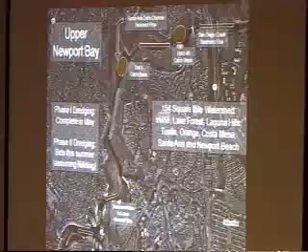He gave an overview of what most people already know, pointing out how the Upper Bay relates to the Lower Bay. The Upper Bay sits within a 154 square mile watershed including the cities of Irvine, Lake Forest, Laguna Hills, Tustin, Orange, Costa Mesa, Santa Ana, and Newport Beach. As shown in the illustration, sediment flows down into the Lower Bay.

The current Upper Bay project is primarily an ecosystem restoration project, a component of which is building two catch basins, referred to as Unit 1/3 and Unit 2, with the Jamboree Bridge shown for reference. These catch basins are designed to catch sediment coming down from the watershed, with the hope of catching enough so that sediment does not make its way down into the Lower Bay.

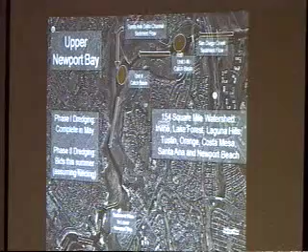Where we're at with phase 1 of the Upper Bay project is that it's due to finish in May, and then phase 2 will go out to bid in probably June or July, assuming stimulus funding occurs or other funding mechanisms occur with the federal government. We feel good that stimulus funding will occur for the Upper Bay project because it's shovel-ready and it's already been designed for the most part, and it's ready to go. So we feel confident that we'll be funded for that.

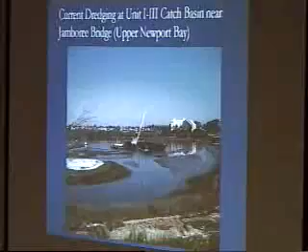This is just a picture of what's happening at the Jamboree Bridge with our dredge equipment that is currently there right now.

Now we see by the illustration that the material makes its way, and has made its way, down into the lower bay. Our preliminary estimates right now are that we need about 1 million cubic meters to be dredged from the lower bay, which is in both the federal channels and the federal areas of responsibility. When I say federal areas of responsibility, I basically mean from project line to project line, and all of these channels for the most part.

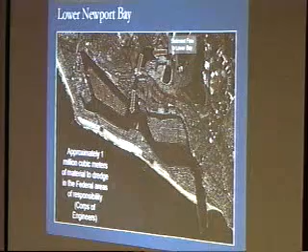So there's 2 different components with our Lower Bay project. One component is funding, and these are both very big components, and we're dealing with them on separate fronts.

Federal funds and stimulus funds are not immediately available. We were hoping that they would come sooner than later and that the Lower Bay project would qualify, but we're finding that some of the other national projects occurring in our nation are more shovel-ready. So now it's kind of a waiting game to see how the city of Newport Beach and the Lower Bay fits into the Corps of Engineers model in terms of funding this sort of effort.

But if that doesn't work, we can always rely, hopefully, on the regular federal budget for next year and beyond.

The Corps of Engineers is committed to helping out the city of Newport Beach. We've had meetings with the Corps, including the Colonel and several members of the City Council, to talk about how the Corps and the city can work together to fulfill a common goal of dredging lower Newport Bay. The Corps has indicated that they're very supportive of the city's efforts, and they will do everything they can to help us out if the city solves our contaminant issues and if there is adequate funding. Assuming those 2 things come into play, the Corps has expressed great interest in coming to help us. So we have a good relationship with them, and we're looking forward to working with them in the near future.

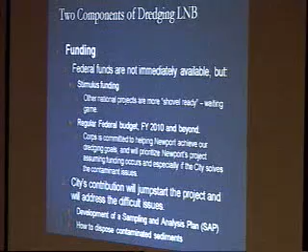Question for you, because sometimes when we talk about the amphipods, my eyes start to glaze over. So I wanted to ask you first about the CAD, because it seems to me that what we need to do is dig this big hole, and then there's some question as to the quantities that we're going to put in the hole. The quantities that we put in the hole depend on the amount of sediment that is determined to be contaminated and not suitable for LA3 or beach nourishment.

Secondly, it's sediment that could include that of tenants around the harbor, such as American Legion in those areas that can't currently go to LA3. So we may be able to help out local tenants of the harbor.

And then another aspect that will help determine the quantities is whether we're going to dredge to design depth or to authorized depth. So I kind of wanted to get some sense of what the range of volumes are that are sort of in play to put into a CAD.

And then within the testing, within the sort of contaminated category and clean category, what the city is doing to determine that line, and at what extent or how much effort do we want to go to fine-tune that line, or at what point do we just want to say, you know what, we've done a lot of testing, and when you get into Tier 4 testing, it gets very creative, there's no standards, and we start thinking eelgrass and that kind of stuff.

So those are some of my questions, I guess, as you move along that I sort of want to try to understand. Okay, and I'll do my best to explain those as the presentation proceeds, and stop me if I need elaboration.

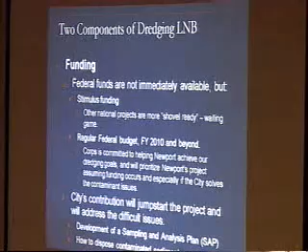So let's see, I'll go back to this slide and remind there are two components of dredging. One is funding, so I just talked about that. But the second component is testing.

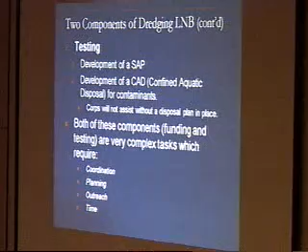One of the things you have to do when you dredge a harbor is develop a sampling and analysis plan, a plan that the agencies all have to review and approve before you can actually do the chemistry and toxicity tests required for any type of dredging program. So one is to develop a SAP, but also to develop a confined aquatic disposal site for contaminants.

Now, the city has not yet committed to a CAD site, but we are going down that path, and I'm going to explain a little bit later on what is leading us to believe that a CAD site is basically the best option for the city of Newport Beach.

Both of these components, funding and testing, are very complex tasks which require coordination, planning, outreach, and time. Coordination certainly among all the agencies—there are so many, 7, 8, 9, 10 different agencies you have to coordinate with when doing a dredging project. When you consider all the fisheries organizations, the Corps, a couple branches within them, the EPA, Coastal Commission, and all these folks that have to be on the same page when developing a plan.

Of course, planning. Outreach is very important, getting out to the community. Both myself and Councilmember Daigle are starting to make presentations throughout the community to let people know what's going on so that we're all on the same page. Time is a factor too—these types of projects don't happen overnight. They take a long time, and there are bumps along the way, so it just comes with the territory when you have a major project like this.

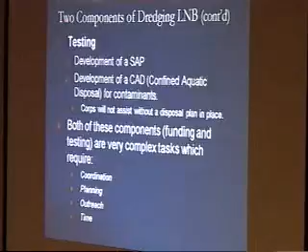This 700,000 is a very big number. I know that, and everyone else agrees to that. It's incumbent upon our consultant who is working with us right now, and I'll get into the next slide, who's doing the testing, to try and narrow that number down so that we don't have to dispose of 700,000 yards.

And ideally, in my mind, it'd be nice if we were somewhere in the 200,000 cubic meter range. I don't know if that's going to be true or not—we're going to know a lot more in the next few months. But this is a large number, and it's something for us to work with right now so that we can plan big and then narrow down as we learn more information.

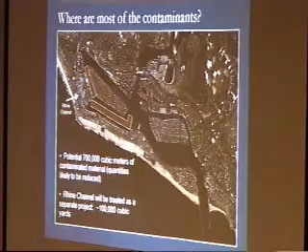Okay. And that consultant we are working with is called New Fields. That's their name, and they're doing all the testing in the harbor.

A lot of things have happened since that contract was let back in September, October, and the project was broken down into segments. Let's just say there were six segments — A, B, C, D, E, and F. We have to change our focus now with this project, looking at it from a segmented point of view to an overall global project point of view.

One of the reasons is that part of our discussions with some of the regulatory agencies months past led us to believe that certain past data we had, we could use and apply toward this current project. Well, we're finding that's not altogether true anymore.

So the agencies are making us go through a little bit more rigorous testing program and protocol, and that's why we're coordinating with our sampling and analysis plan that we turned in yesterday. Our sampling efforts have been expanded, and areas where we didn't think they would require very much testing now have to be tested and have to go through bioaccumulation, chemistry, and toxicity tests. Right now we're trying to negotiate with the agencies to minimize the degree of that testing.

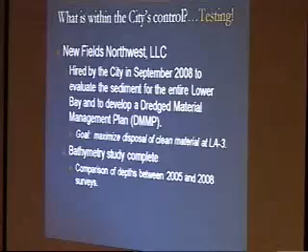Okay, so I've kind of touched upon this already. The goal, of course, is to try and maximize the material that goes out to our offshore disposal site in the ocean, called LA3. Our bathymetry study is complete, and what that does is compare depths of the bay from 2005 to 2008. That was important because it leads us to determine how much quantities we have to dredge. It compares depths.

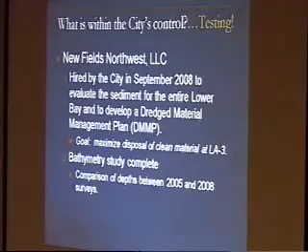Chris, in layman's terms, can you share with us the difference in the depth of the lower bay between those two studies?

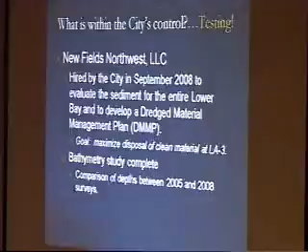There's not a whole lot of difference, believe it or not, between the depths in 2005. We haven't had a lot of sedimentation in those three years. So when we were getting back to our testing contract, we were hoping that a lot of that data from 2005 would still be valid, since there hasn't been a lot of increase in sedimentation. But we're finding that not to be true now.

I don't want to get too much into detail, but you have amphipods, which are test critters used as benchmark test critters. If those amphipods survive, that means you have sediment that is suitable for ocean disposal. If they don't survive, then you have to figure out where to put that sediment, among other tests, of course.

But believe it or not, picking out a suitable species of these amphipods is a complex process. We found that some of our different amphipod species failed. So we spent about a month or two going through a whole other retest so that we could get a suitable species that would work for Newport Bay.

Given that there's over 7,000 kinds of amphipods, how do you find a suitable species? Well, in the Green Book, they have certain preferred species, like a suite of species. Some agencies, when they review the plans, prefer some over others for certain applications.

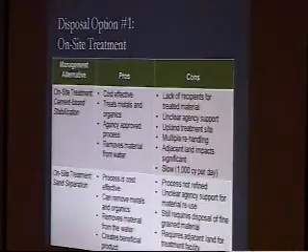So with that, I'd like to introduce Steve Cappellino. If you'd please come up here, Steve. Council members. As Chris mentioned, you have a document there in front of you that we just put together, and what we really tried to do with this document was lay out a feasibility study. There's been a lot of talk about building a CAD site, and I'll talk about that in a second, what that is, and what are some of the pros and cons with that.

But one of the things that we wanted to do with this document was to try to lay out all the options that are out there right now in Southern California, and some of the pros and cons. Try to describe to you, if you did select one of these other options, what would that look like to implement in Newport, and lay out a little bit of a path of why we've come before Chris and said we think that a CAD site would be something that you should consider. So I'm just going to quickly run through these. Please interrupt me if I don't provide enough detail on any one of them. But really, when you're dealing with contaminated sediments in Southern California, you're pretty limited in what options you have.

One of the first things you could do is you could look at treating the material. When we say treating the material, you're trying to do something that can either immobilize the contaminants in the sediment such that they don't cause biological effects either to people playing in the water, eating fish that live in the bay, or actual effects to the animals living in the bay.

So you can either stabilize them to try to make the chemicals so that they become inert, essentially, or you do something that strips out the contaminants. Essentially what you're doing is you're either leaving the material behind in the bay in an inert state, or you're removing it, taking the contaminants out, and then trying to beneficially reuse that material.

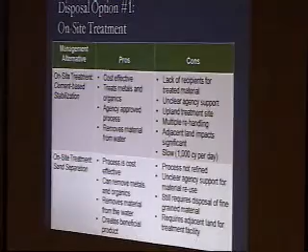Probably the biggest problem with Newport is that the sand content for a lot of the areas where you guys have contaminants is not very high. Where you guys have sand, most of it's pretty clean. Where you have a lot of your contaminated stuff, like down in the West Lido area, up in the Rhine Channel and stuff, the sand content's actually pretty low, low enough that it's really not very cost-effective to do this, meaning that you go through this entire process and you treat it, and you still have 50% of material that has to get dried and taken to a landfill, and the portion that's able to go out to the beach is not very good. It's typically reserved for places where you have like 90, 95% sand.

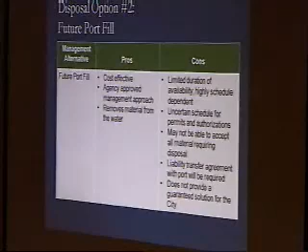One of the more popular options that has been used in the region up until the last couple of years was to look at a port fill, and I say future port fill there. But basically, Port of LA, Port of Long Beach, they're always creating new terminals. They're filling slips, they're building and expanding their terminals there. And the way they do that is essentially just dike off an area, pump or dig out all their contaminated stuff as well as clean material, and then push it in there, dry it out, put clean stuff on top, asphalt, and then turn it into upland.

That used to be a good option in the region up until a couple of years ago when a lot of the environmental impact issues started to rise, like air quality and degradation to local neighborhoods and stuff. And what happened is you saw a lot of lawsuits come out up in LA Long Beach.

Pretty much what happened a few years ago was a lot of these large development projects kind of ground to a halt. Unfortunately, the need for fill material, the supply that needed to go into there, didn't stop growing. What happened is it just backed up. The port - most of these fill sites get filled up with port stuff. They obviously get preferential treatment for their own material through normal operations up there. Secondarily, it would go to Corps of Engineers channels or local city governments up in the area, like the city of Long Beach, for example.

Right now, port fill sites are very few and far between. There's a couple going on right now, and they're overcommitted with the material that's going to go in them. So it's not a real good approach to bank on as an alternative, to say this is where we're going to put all our eggs in this basket.

One of the big things with port fill sites is the fill site is usually just one piece of a much larger puzzle when the ports create these. Typically what happens, like we're working with the Port of Long Beach right now on a very large fill site, and the project we're working with them on is one of 6 or 7 projects going in there. All of these have to be coordinated at the same time - when the fill site is ready, when the current tenants need to get moved out, when new tenants are coming in. One lawsuit in any one of those projects puts a delay into the entire thing and creates a domino effect.

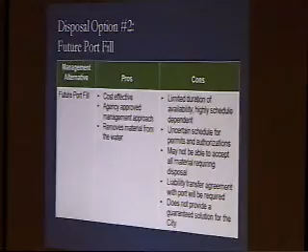There's also a big issue with liability transfer agreements. We've been involved in a few with the ports up there, and typically if they're taking material in from outside their own site boundaries, they have pretty onerous transfer agreements required. Basically it says that if anything ever happens with that material, or if anything down the road impedes their ability to develop that site, they're going to come back and hold whoever the owner of that material is liable.

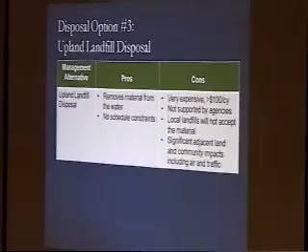Upland landfill disposal is really a pretty simple option. You dig it up, you have to dry the material so there's no water dripping out of it so it can be hauled on the road. Put it in a truck, haul it to a landfill, and dump it.

As Chris mentioned, we were involved with the Rhine Channel feasibility study for you guys five or six years ago, and we looked pretty hard at the landfill disposal option. We actually included meetings with the Orange County landfill authorities, and their official position was that, A, they didn't have the capacity to take the amount of material that would be generated, and B, they didn't really want the material because their landfills weren't necessarily permitted to receive contaminated marine sediments. So their official position was they didn't want the material.

The LA Regional Water Board - really covering LA and Orange County - their official position is they don't want contaminated marine sediments going into the county landfills. There have been a few small landfill disposal projects; I think up at Bolsa Chica there was some small stuff that went out, but typically flying under the radar, a few thousand yards here and there. But for a project of this size, if you want to take it to a landfill, you're looking at a private treatment facility, something like a Waste Management facility up in the desert north of LA. Typically, the city would enter into a contract with somebody like Waste Management.

They would come in for somewhere $100, $125 a yard. They would take the material once it had been dredged and dewatered, put it on their truck, sign a piece of paper, and then you're removed of all liability, and they take it away and haul it to one of these facilities. That's really your only option there. Very expensive. Agencies don't really support it, not because they don't think it's environmentally protective—these facilities are designed to hold this material—it's just that they don't want to see the capacity being used up for marine sediments. They'd rather see that material used some other way.

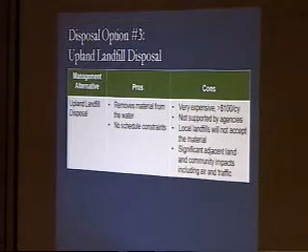Long Beach CAD site, just to jump the gun a little bit about what a CAD site is: it's essentially like an underwater landfill. Basically, you either take an existing hole in the ground that somebody else has already dug for some other reason, or you create a hole, put all the contaminated stuff at the bottom, and then cover it up with clean material, so that what's exposed on the surface layer for the animals and fish is clean native sands.

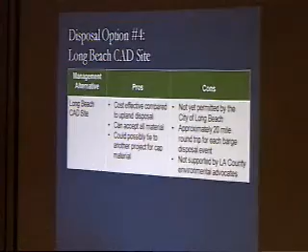In Long Beach, if you've ever been out in the Inner Harbor, there's a whole bunch of oil islands, with nice palm trees growing around them. Well, inside that circle of palm trees are oil rigs—they're basically drilling all over under Long Beach. The way they created those islands was they dug these giant pits in the Inner Harbor, stacked the material up, and created an island. As a result, all over the Inner Harbor of Long Beach, there are all these big pits.

The Corps, the City of Long Beach, and a bunch of other agencies back in about 2001 did a pilot study to prove that CAD sites would work here. CAD sites are used all over the U.S., have been used in the U.S. for many years, and in Europe for many years, very successfully.

Question for you—you're saying that in Long Beach their CAD site's been inclusive, accepting all kinds of material. If Newport, if we were to do one in our harbor, what's the viability of being able to accept sediment from some of our residents and so on who are now unable to dispose of their materials? We have the RGP 54, so the city's made every effort to simplify the dredging process for our local residents, but we've been really stymied by the contaminant issue. So would that be viable at all, to take that sediment too?

It's definitely viable, and that would be something covered during the permitting process—when you get the disposal site approved by the agencies, you'd essentially tell them this is what the intent is for, and it's going to be for everything within Newport Harbor, whether it's city, Corps, or local private dock owners who want to take the material to that site and use it as a low-cost alternative.

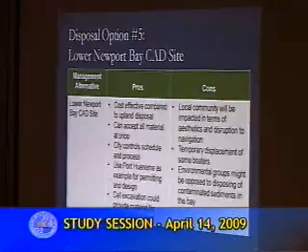What would be the schedule for permitting in Long Beach as opposed to permitting for a de novo facility we would create in Newport Beach?

Permitting a facility in Long Beach obviously would be a much quicker and cheaper alternative because it's already there and it's already been tested. More importantly, the site's already constructed and it's actually been used there. The real issue would be whether or not the city of Long Beach wants to permit it.

The city has concerns that if they permit that as a facility, there'll be pressure put upon them to accept material from other areas, whether Newport or Marina Del Rey or any place else. There's some internal struggles going on about whether they want to be perceived as taking other people's waste material, which is why this type of work is primarily what our firm does, so we have a lot of experience with these.

What we find out is that a lot of these end up becoming localized solutions. We're building one right now up in Port Hueneme Harbor for the Navy, the Corps, and the Oxnard Harbor District. It's this exact model that we're talking about here in Newport and what was used up in Long Beach. That one was really the same situation.

There's available space in the Port Hueneme CAD site right now that's in construction today. The problem is that because the Navy owns the land there, they have some internal policies about waste coming in from outside of the harbor. So anything that's within that harbor can go in that pit pretty easily. Nobody really has issues with it, but as soon as people start bringing it in from outside, it really starts to complicate it.

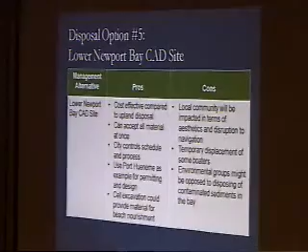I understand that because some of the council members saw a graphic where this was originally proposed right in the middle of a mooring field. Right, there's been some adjustment to that.

Right, the more recent area we're looking at is right in between, is that G and H? H and F, okay. Originally when we drew the first box in the preliminary maps we sent over to Chris, we put it squarely on top of where the mooring field was because we thought there would be less complaints if you moved people off their moorings than if you impacted an open area where sailboat races occur. But as you guys mentioned, it sounds like it was easier. There was no technical reason why we had it in one spot or the other, so the current idea is to shift it over to eliminate that.

And of course, there could be some environmental groups here, and there probably will be residents that would not be happy about the concept of disposing contaminated sediments in the harbor, even though they would be buried.

So what does a CAD cell look like? It's a very simple concept. Basically, you're just excavating out a pit, putting the contaminated material down at the bottom, and covering it with clean material. This clean material would be like native sediments from the harbor that are clean, basically what's out there right now. Plant growth and stuff would reestablish itself on top.

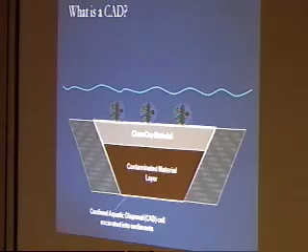Technically, from a chemical standpoint, to prevent the chemicals from moving, 3 feet is usually enough. The standard most people go with is 5 feet. In Port Hueneme Harbor, we're using 10 feet, because the CAD cell we're building is right in the middle of the active turning basin in the center of the harbor. So we build it at 10 feet so that if they wanted to deepen the harbor by another 5 feet at some point in the future, they could just excavate down without having to move any of the material.

So probably the safest option would be to assume about 5 feet. Question for you, Steve.

We're going to continue to pursue some of the testing, but we don't know if we're going to be able to clear some of those areas. Based on your experience, I know Josh has worked in the regulatory department at the Corps, what happens in a few months if we don't get clearance? What would be the city's options at that point? Can we just throw in the towel and say it's contaminated, and it's not that much more expensive to just put it in a CAD? How do you see things two or three steps down the line?

Our feeling is that the testing you guys are doing right now is great. Anything you can do to get the material out in the ocean is the best way to go by really fine-tuning what those numbers are. What we found, and it's really no different than what we ended up doing in Port Hueneme, is we started a parallel path. We started the designing and engineering assuming the worst case. You can always go permit it to the agencies telling them you need this big of a hole, and on the side you're testing and trying to minimize the amount of material that's going to go there. Nobody's going to complain if you come back and say the hole needs to be half that size, because you just lessened the impacts.

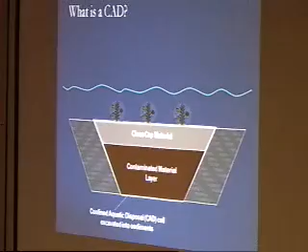But you can also put silt curtains around the hole. So where the barge goes in, drops the material, and leaves, they close the curtain behind it, essentially closing the hole in, so any material that comes up will settle back down. It's just a factor of the currents and how deep the material's dropping. Typically you try it a few times, see how it behaves, and adjust. At Port Hueneme, for example, we're not having any problems at all—none of the material's coming back up out of the hole. So it's just the type of material, that's how it's working.

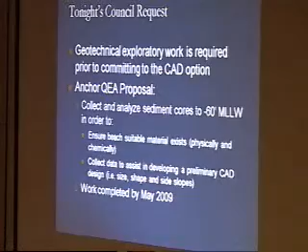Tonight's council request—to recap, the first part of this process was to develop the feasibility study, which everyone has on their desks right now. The second step is to do some geotechnical exploratory work, which is important because it tells us what type of material we're dealing with down in the harbor floor, whether it's sand or if we're going to hit rock. We're pretty certain we're not going to hit rock, and fairly certain it's going to be nice sand. But we have to do this preliminary study before we can make a decision to proceed further and make the big decision later on.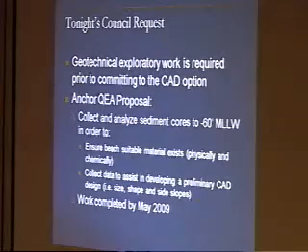So they're just going to core down to minus 60, in about 3 holes. They can do that within a couple weeks, analyze it, and be done with that by the end of May.

Just to give you an idea, the question was asked where the CAD site would be in relationship. We're proposing it to be around in this general area. We can fine-tune that, of course. This area right here is where about 200 moorings are. This is generally open water. There are about 20 moorings right in this area. So we'll impact some moorings, but certainly a very small percentage.

This right here is an alternate CAD site that we're going to go and do a core sample there as well, just because if these don't happen and we're out there the same day, let's put the guys to work, and we'll do an alternate site in case something bad happens. It's good to have a backup plan.

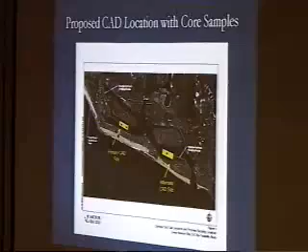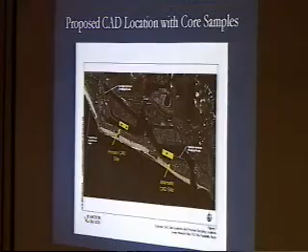Chris, the primary site appears to be in one of the places that's a primary source for material that would otherwise be placed in the CAD. Are we going to sort of bring it up and put it right back down, or how does that work? It'll be constructed in a way where those are some details that we'll have to work out as far as the mechanics of how the CAD site is actually built. We'll look forward to a report a little bit later on.

But maybe there'll be two holes, like an interim hole. You build a small hole, and then you put the top layer of the big area into that hole, and you kind of juggle the material around so that you have the least impact, or you're not handling the equipment more than once if you can, and you're trying to find a home for all the sediments. So that's a good question, but we don't have all the details worked out. Can't just put a cap on it and call it done?

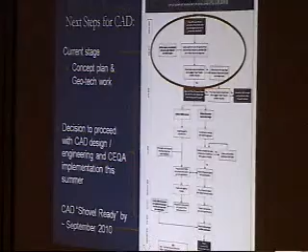I know. And this is my last slide here, and I don't expect anybody to be able to read this, however, it is in the fold-out section in your books there. This is kind of a decision tree, and this circle represents where we're at right now. We've done our concept plan that is on your desk, and we're asking the council to consider the proposal for the geotech work. That'll take us to right here. This line right here is a time frame. This says June of 09, July, September of 09. This says August of 010.

And what this section does right here is I'll probably be coming back to the council in June or July, or maybe a little bit before, to really get the go-ahead from council. If we finally choose to go with this confined aquatic disposal site, we'll need to go and start our CEQA process, which follows this line right here. And we're probably going to be doing an EIR. I can only imagine that that's the steps that we'll be taking.

But at the same time, while we're doing an EIR, on this right side, the engineering phase has to begin. It's going to take a while to engineer this and do all the details. So we see two parallel paths, so that come September of 2010, we'll be shovel-ready to build the CAD, assuming everything goes along as planned.

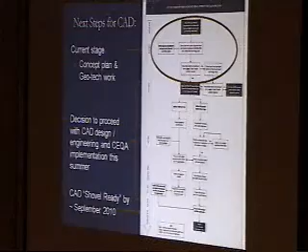Chris, when we had the meeting with the Corps, I don't know if it was the gentleman that just got up and spoke or who, but somebody mentioned that they thought this would be done on a mitigated negative dec and would get through the permitting agencies in 6 months, and it looks like you've completely changed that philosophy there. Something happened? No, nothing's happened. I'm just being overly prudent.

We haven't decided if we'll do an MND or if we'll do an EIR. I've asked our planning department and planning director to help guide us through this process so that we can figure out the best alternative. But EIR is certainly a worst-case scenario, and I think it's better to plan for that. I think there is an impact. How much of an impact is to be determined, and I think we need to think about that some more. So I don't want to hang my hat on an MND just yet.

But Chris, it looks like even if we do an MND, the time frame is about the same because it runs about to where you would get finished with your design. That is correct. As I understand it, the EIR might add perhaps 2 or 3 more months onto the process. It's still going to be a long process.

Those details need to be worked out, but we're weighing both options. Okay. And then when are we going to talk about the money cost to this? I know that the Corps seemed to be pretty insistent, or I don't know if insistence is the word, certainly expecting anyway that there would be a certain contribution coming from the city. In fact, the Colonel was trying to get out of us a dollar amount as far as how much we're going to commit to this project.